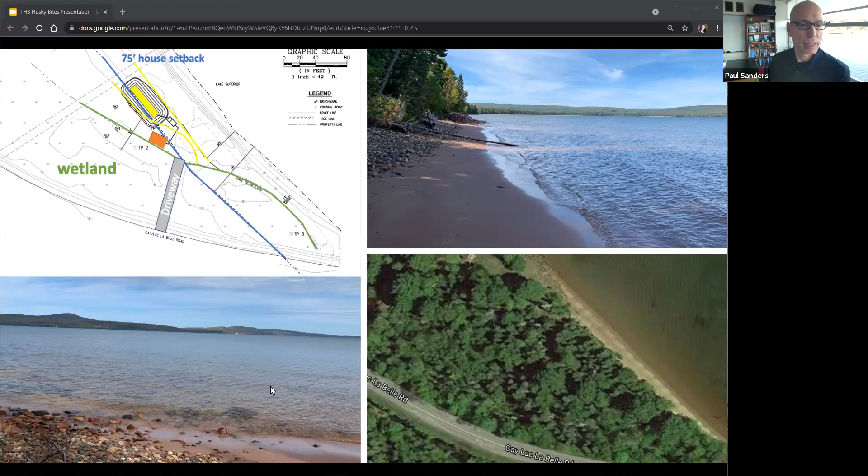Okay, next slide. So this is our first poll question.

This is a great question. I have no idea what the answer is. Well, I tried to be creative in some of those answers. Okay, I'm going to go with Gray Beast. So the choices are: Betty Grease, Gray Beast, Green Bay, or East is Better. There's a live poll going on, and the top 2 choices seem to be Gray Beast or Green Bay. Anyway, this is hilarious. Tell us the answer, Paul.

Okay, so the answer is actually Gray Beast. Good job, the majority or the plurality of people got that right. Let's move on to the next slide then. And if you have this in front of you and you don't want to see it anymore, just hit the X on the poll question and the little box will go away.

Okay, so Dave, do you want to take this slide? Oops, we can't hear you. Unmute. I'm unmuted.

So the design goals here are to use sustainable design to build the building. We had a couple other chief parts of that, and one was net zero energy. In other words, we wanted to produce as much energy on site as we would use on site. We used the source method, and I'll go into more detail on that later.

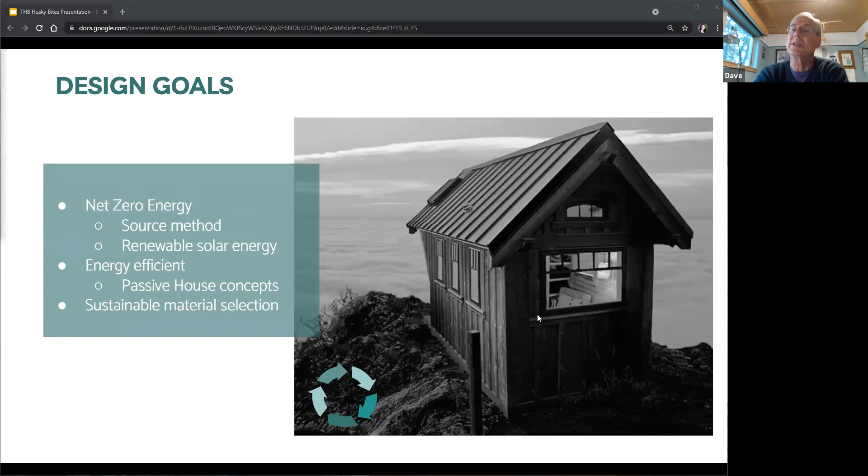Since I'm in material science and engineering, I should have my token material slide in this deck. Our strategy with sustainable materials was pretty simple at a high level. First of all, we wanted to avoid concrete because concrete contributes globally 8% of greenhouse gases. We used wood, a renewable material, but also whatever we build into the structure, we sequester the carbon there.

As a metallurgist, I'm partial to steel. One of the reasons we like steel for an exterior is that it's maintenance free essentially for the life of the building, but it's also typically about 50% recycled, one of the most recycled materials that we use. And finally, we used green insulation. This is just an example of some of the charts we looked at to make our material decisions. Fiberglass insulation was used to minimize the carbon impact.

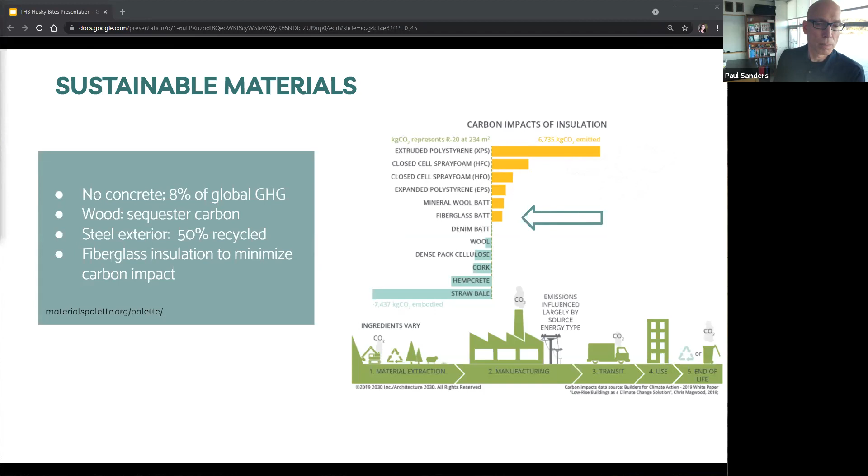Okay, and then Dave's got a couple slides here on net zero energy. Yes, net zero energy by the source method. As we worked through this as a team, this was hard for us to get our heads around at first. So when we talk about the source method, what we're talking about is all the energy that went into making the energy that comes into the house.

Say we're looking at electricity and coal is the power plant. So we're looking at all the energy that would go from extraction of the coal through the steam generators, transmission lines, to the plug at the house. And the source energy conversion factor for electricity is 3.15. So for every one unit of energy we get at the house, it took 3.15 units of energy to produce that. So electricity is about 33% efficient at the plug.

The other fuel we used on this project was propane, or LP. Here you can see the conversion factor is smaller - in other words, there's less embodied energy in making propane than there is in electricity. So our goal here is for all the electricity and propane we consume on site to be equal to or less than the production we would have on site.

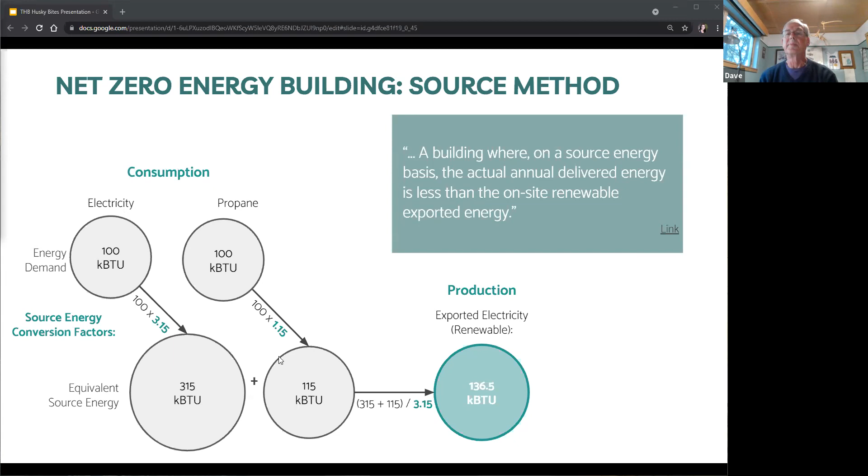So here is a little bit more about the passive house concepts we used. Let's start in the upper left-hand corner: no thermal bridges. Let's talk about a standard 2x4 or 2x6 wall, if you're familiar with that from residential construction. The stud goes through the wall from outside to inside. Wood is a fairly good insulator, but not as good as fiberglass or the material in the cavity. Therefore, we consider the 2x4, 2x6, a thermal bridge.

And we would like to have a thermal break on that bridge. You can really cut down on your energy use if you separate the conductive components from the outside. We used a double stud wall - just imagine two frame walls spaced apart, so there's very little conduction of heat through the framing. Now the thermal envelope - the part that separates the habitants from the outside - we were able to build walls that were at least R30, a roof of at least R60, and a floor of at least R30.

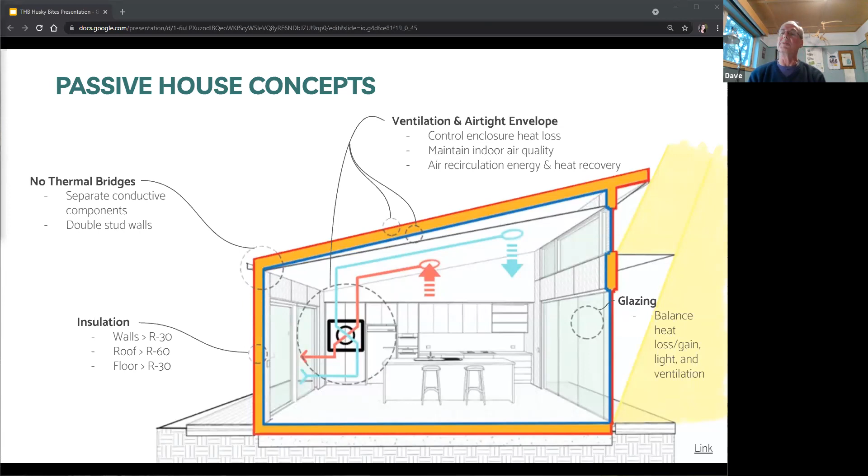So here's our second poll. Was Paul looking for a net zero energy house? Yes or no? I know I sort of gave it away earlier. Just seeing if you were listening.

Dave, I got to have you come take a look at my house. You can hear the wind blowing through it. Yeah, did the curtains move? Yes. Yeah. I think it's like R minus 10 or something like that. I don't know. It's some sort of bad number.

All right. Okay, so we're not doing real well on this question. No, I wasn't looking for a net zero energy house. Dave and the students and Chris were seeking to build one, I think, and I got one. So I'm thankful for that, but it wasn't my original intention.

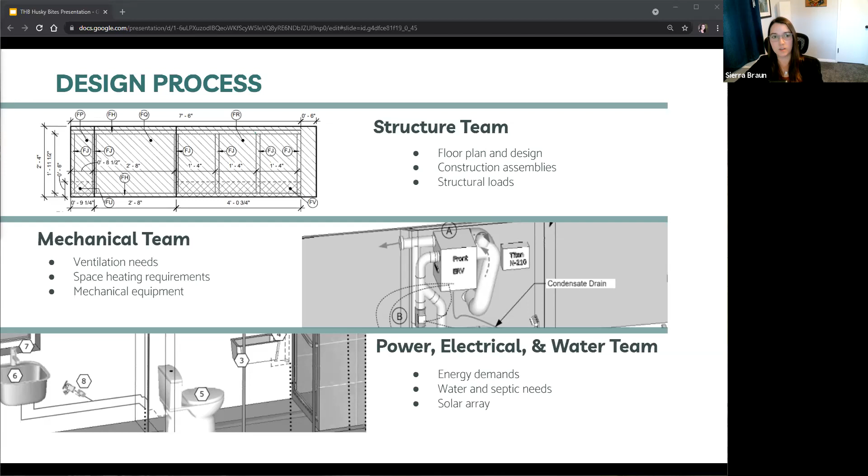We also had a mechanical team who worked with our proposed wall assemblies to determine ventilation and heating equipment to be used in the house, and a team that focused on getting power, water, and electricity while aiming for those net zero energy goals. Another aspect of this project that's still in the works is the solar array system and a home performance monitoring system that Nick is diving into this semester. And like Dave said, we used a bunch of different software packages, both from Passive House and some that Dave designed himself to make it all work.

To show some of our progress through the spring of 2020, I added some of our early design ideas for the tiny house so you can see how much it morphed over the semester in our design phase. Like I said, the learning curve was really steep in the beginning. All of us were trying to pack our brains with knowledge from Dave while learning the different design programs for drafting and energy modeling. And we were trying to make sure we were meeting everything Paul wanted in his tiny house for his family. So from these early renders, you can really see how the house has evolved, especially in terms of roof design, layout, and exterior appearance.

You'll see the bathroom moves around a lot, the roof changes, and all of these were in consideration of where the solar array was going to be placed, as well as getting the best views and performance monitoring. So each iteration of these houses we modeled in the different design packages to determine which one was going to perform the best for our goals. So yeah. Another thing we had to figure out was how to break this house apart into sections or panels so that we could build them on campus.

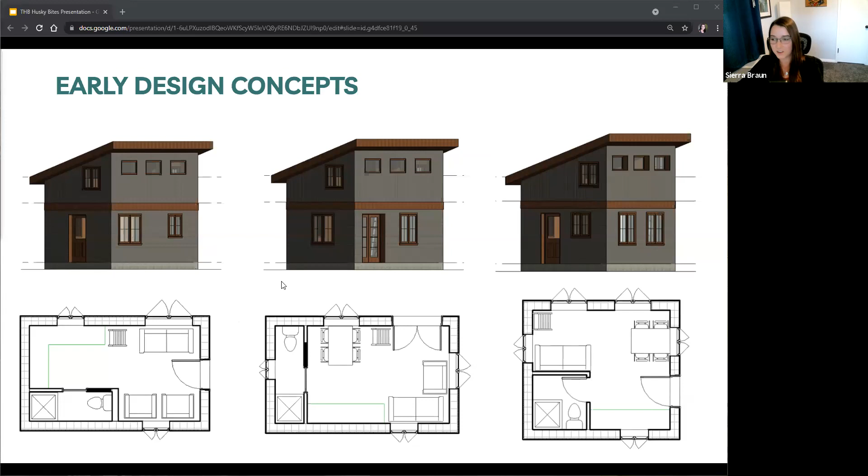Now I'll move on to the final design. So like Paul showed earlier, this is the same diagram from there. His lake property is on a wooded shoreline with a bunch of wetlands. So here's the building area again, very small, really basically only a tiny house could work. So it was perfect for us. The high water table also gave us some challenges with the driveway and required an engineered septic system and shallow foundations.

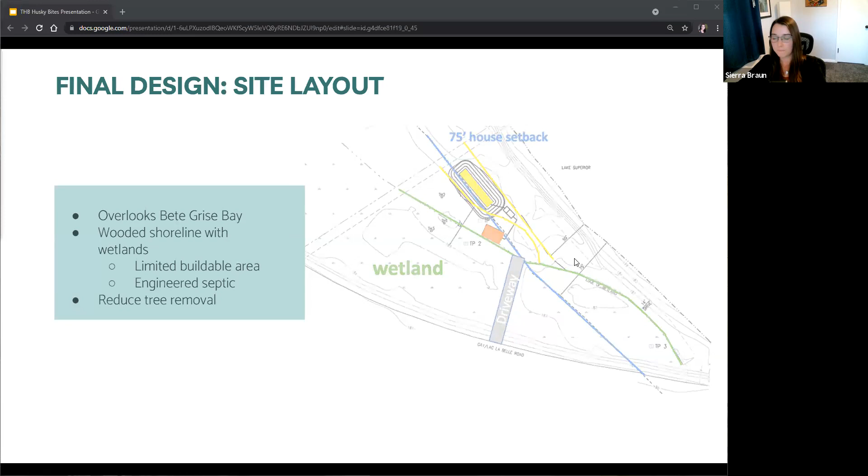If you look at the site render, you can see the viewing window to the northeast towards Bear Bluff and Mount Houghton. And in placing the house and solar array, we really aimed to reduce tree removal by utilizing the naturally open areas wherever possible.

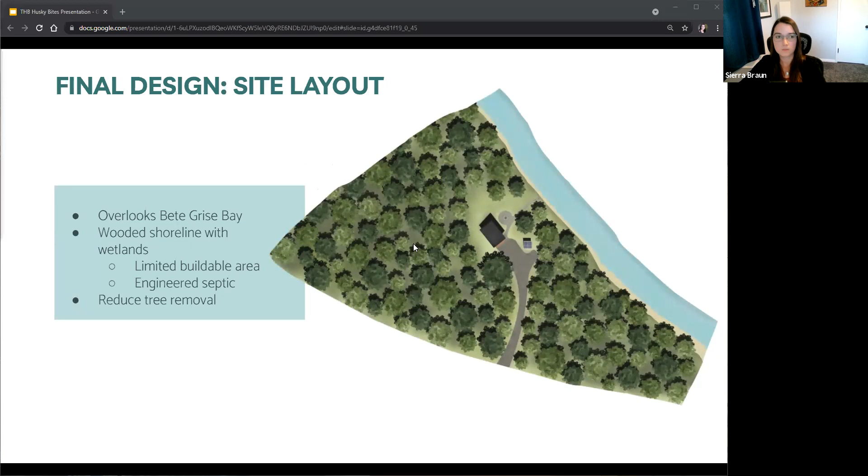Looks like we've got another poll question here. What is the legend of sound heard on Bete Grise? Yeah, so what is the legend? So the choices are: the voice from a Native American who lost her lover on the Great Lakes. The sand sings by pressing it with your hand. The sand barks when struck. The sand loses sound when removed from the beach.

I guess I really skipped my articles there. Sorry about that. I need about 3 thes in there.

You did good, Paul. Well, it looks like overwhelmingly people are going with the voice from a Native American who lost her lover on the Great Lakes. Yeah, so the answer is actually all of these, but the origin of the legend is this voice from the Native American. And then the idea is that the sand sings by pressing with your hand or when you strike it, and that actually helps this Native American woman call her lover back. And I guess the legend is also that if you remove the sand from Bete Grise, it doesn't make the noise anymore. Oh, yeah. Okay, so thanks for that poll, and we'll carry on.

Cool. So yeah, our final design on the exterior had a lot to do with the solar array placement. We had originally considered placing it on the roof, but we turned away from that in keeping as many windows and as much headroom in the loft as possible. So in determining the exterior look, a lot of it also came down to material selection. Steel siding and roofing was picked, like Paul said, for its long-lasting durability, high recyclability, and low maintenance. And of course, Paul was interested in the metallurgist vibe.

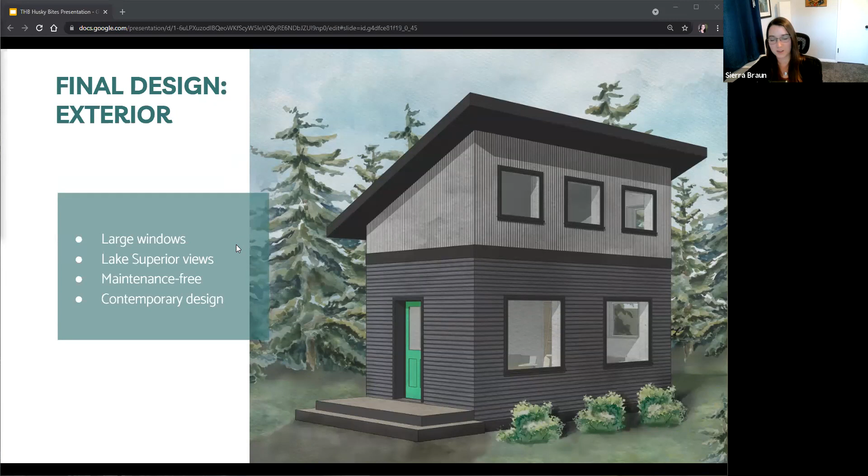As far as the interior, we kind of unanimously picked this floor plan. It's packed into a 12 by 20 footprint with 180 square feet of heated space on both the main floor and the loft. In the floor plan render on the right, you can see the bathroom and kitchen to the south, and the living room and dining area are left open to the views. The open ladder leads up to the loft where there's sleeping space for 4 and a mechanical closet. And it still has headroom to stand up in the loft, which was a big criteria for Paul. He's a tall guy. 7 feet on the tall side.

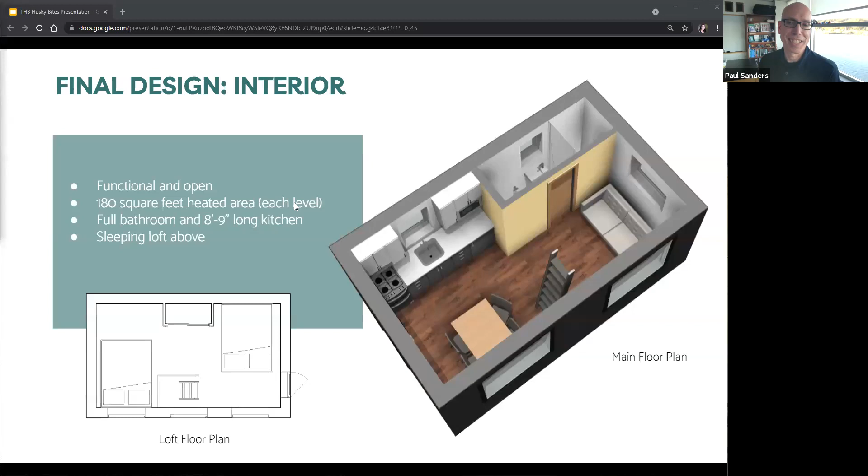So as I mentioned earlier, a ton of thought went into the construction assemblies to help us meet the high standards we set for the tiny house. So I'll just highlight the ones here, which Dave already kind of touched on. For the walls, we used two 2x4 stud walls spaced apart to provide that thermal break and a deep insulation cavity. Though they weren't the thinnest option, we decided that the availability and cost effectiveness of wood and high R fiberglass were more advantageous than some other more novel new products.

For the roof design, we stuck with wood frame construction, but stacked 2x12s and 2x4s with insulation between them to keep that thermal break. It also allowed us to have a thick roof assembly at nearly R60 while maintaining a thinner profile from the outside. And for window selection, we ended up with triple paned glass. It's filled with argon, and they also have insulated fiberglass frames, which is a pretty unique product, I guess you could say. So they'll be as high R value as possible for windows.

And we carefully placed where they were able to be operated, so where you could open the windows for ventilation, and also looked into the glazing type we used depending on the wall that the window was placed in for passive solar gain. And to align with our goal of no concrete, the whole house sits above the water table on a shallow wood frame foundation with gravel trench footings. Another key point about using conventional building materials was that it allowed our team to quickly jump into on-campus production of the wall panels, which we'll get into after Nick's digital tiny house walkthrough here.

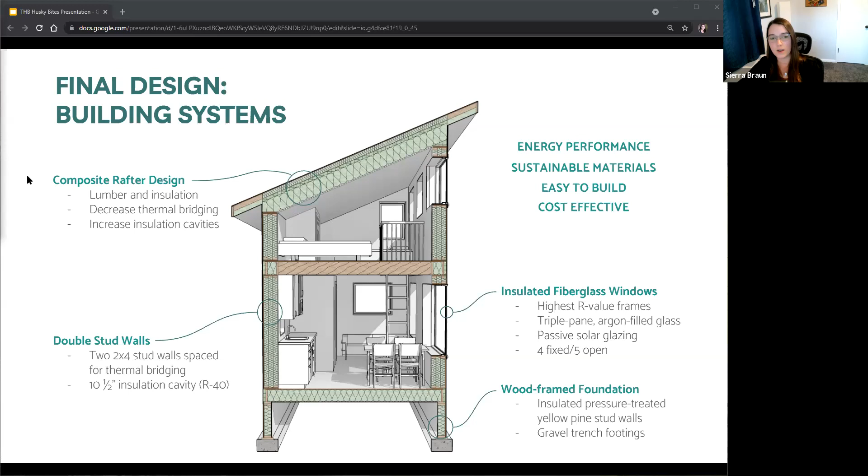Yeah, let's see if this works.

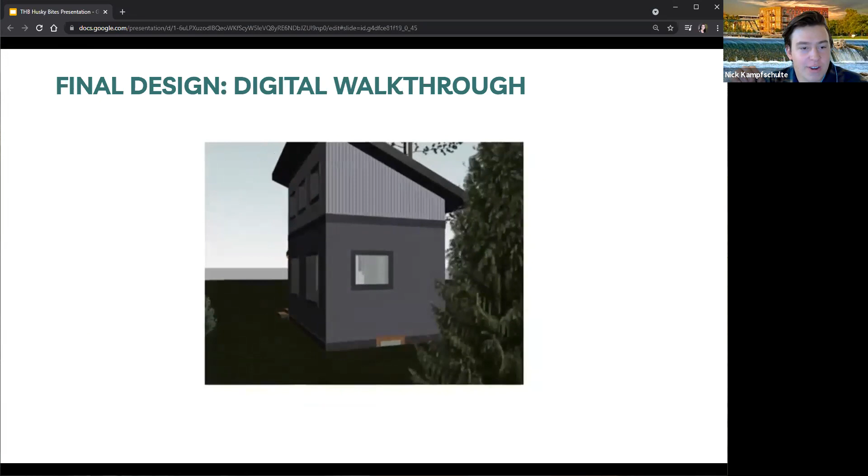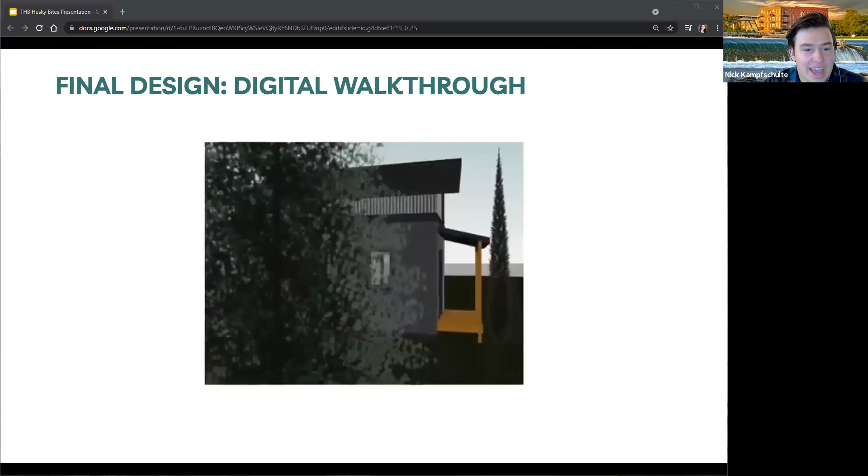Oh, seems to be going pretty well. So we're kind of flying by the exterior of the house, and I put in some trees to kind of help get you in the mindset of being on Bete Grise. So here we're coming in on the back, and the site is much more heavily wooded than this, but I wanted you guys to be able to see the house pretty well.

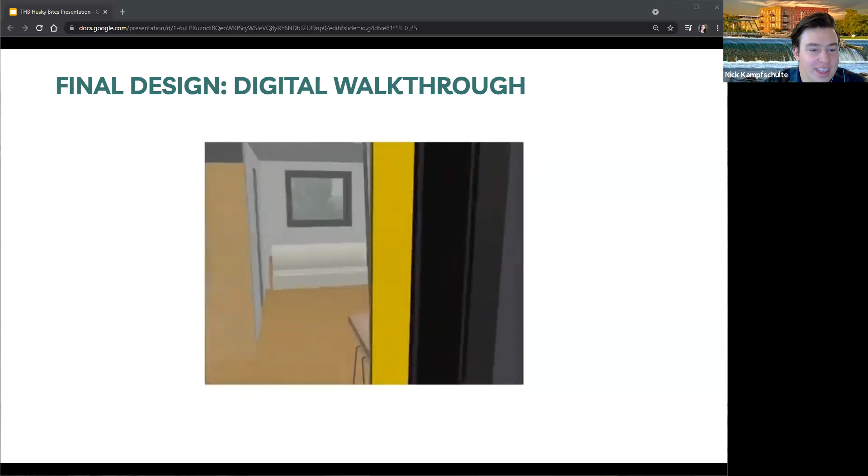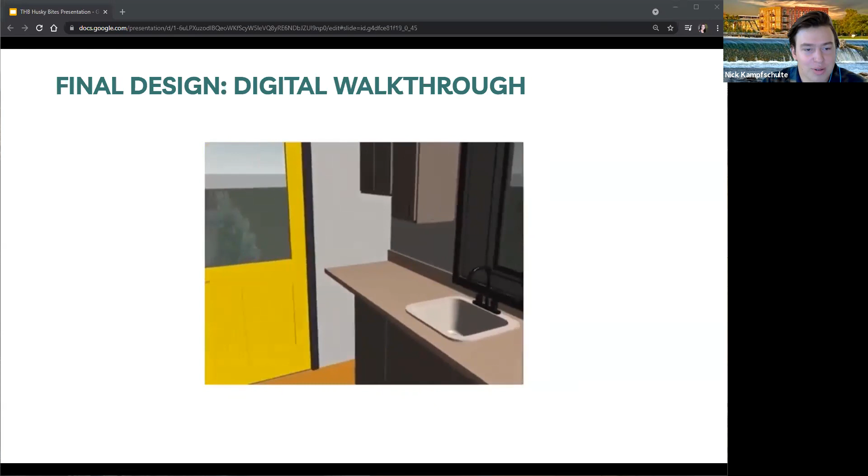So now we're zooming into the house through the front door and getting a nice look at the kitchen area, into the living area, and this is the bathroom here. It's a little fast. I'm admittedly not great at these 3D walkthroughs. And there's the kitchen, and we're going to head up to the loft. And the loft, you can see we have a lot of sleeping space, so 2 queen beds up there.

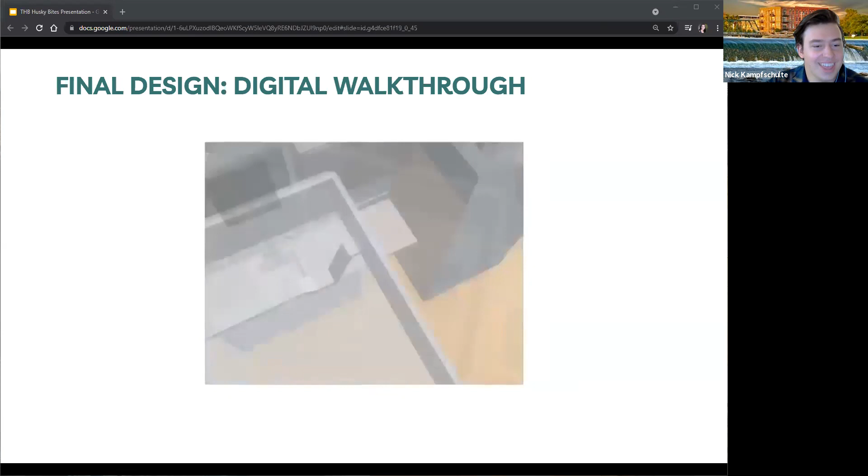And excuse the fact that it's a little see-through. I was having an issue with the software. Couldn't really remedy that issue, but now we're flying out the egress window, and there's the scene from Bete Grise right there. All right.

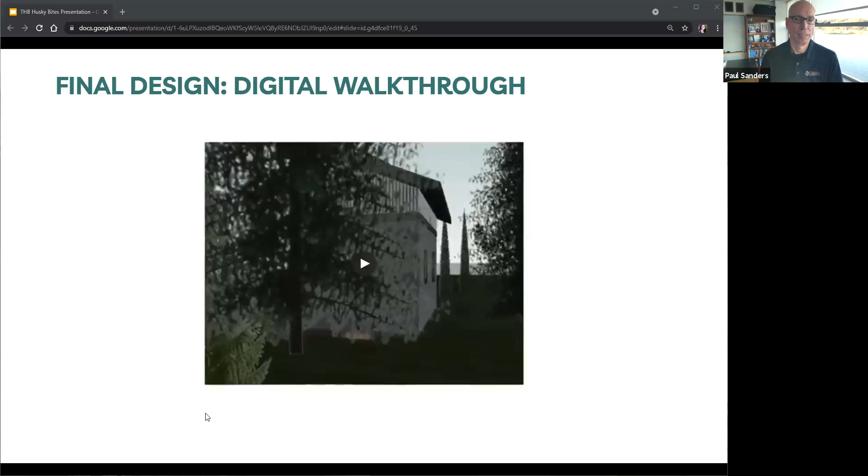Looks good. Oh, that was fun. Nicely done, Nick. That was really fun. Thank you. Nicely done, Nick.

So I believe we got another poll here. So could this project produce 2 architecture students? I vote yes. And their names are Nick and Sierra. You might be right. About Sierra, but I didn't know about Nick till he prepared his bio for this event. Yeah, okay, good. So we got yes, 94%. That's the right answer. A plus. Guess there's your decision, Nick. There we go. That takes a lot of guesswork out of it for me.

All right, so Sierra touched on, we built this building in panels on campus. And so how do you get a ton of engineers, a lot of which haven't held a hammer before, to build a house? And part of the answer to that is Chris Wojcik. So he really stuck his neck out for us and got us this lab space on campus, really prime location to receive lumber shipments. And in there we had three kind of teams working at all times. We had a management, sawing, and framing team.

And the management team would organize meetings, keep track of our COVID log, and also work with sanitizing. And then sawing people were in charge of using the bill of materials and construction drawings to cut out all of the lumber that was needed, and then they would send it over to the framing people, who would interpret the drawings, put them where they had to go, and confirm dimensions when assembly was complete.

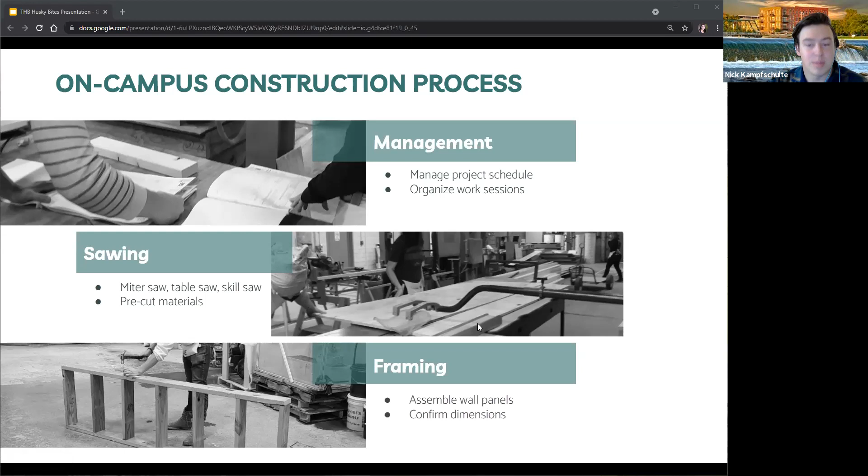So this next slide kind of goes in more depth on the foundation walls. Foundation grade lumber for longevity and rot resistance. And then that picture on the left, you can see we kind of mock assembled the foundation in the lab. We had pretty great neighbors in the lab. They put up with all of our shenanigans building a house in there, wall by wall. But here we checked the overall dimensions to make sure when Paul got on site, there wouldn't be any head scratching.

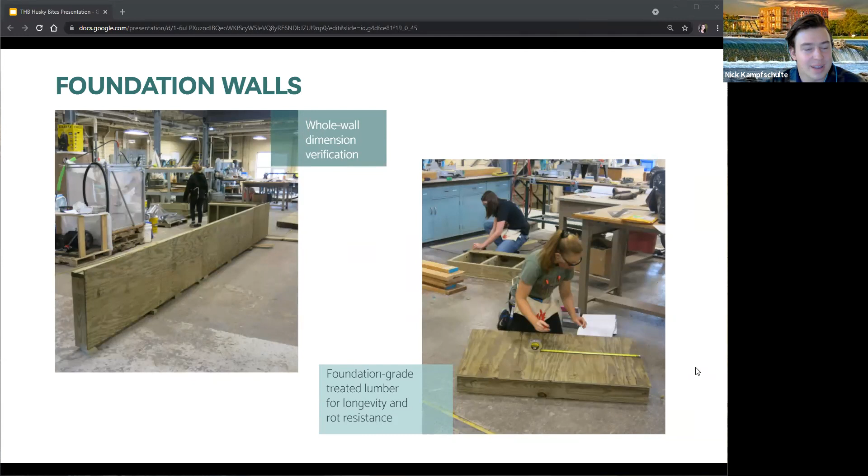So after we built the house from the bottom up, so after the foundation, we moved on to the main and loft walls. And here you can see, I think I'm in both of these. We're working on the double stud walls, and conveniently enough, the spacing was such that we could put a 2x4 in between them and nail them all together. So there's Lexi and I working on one of those. And we actually had to push the double stud wall up against a post in the lab to be able to hammer on it, because the floor was just so slippery.

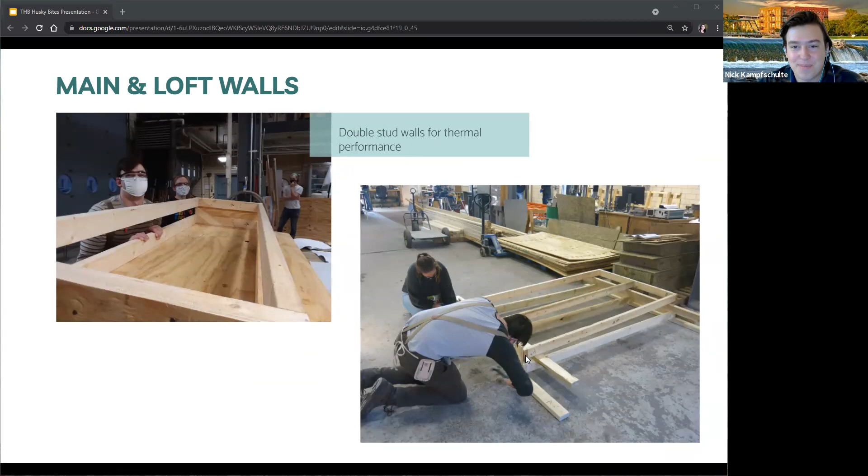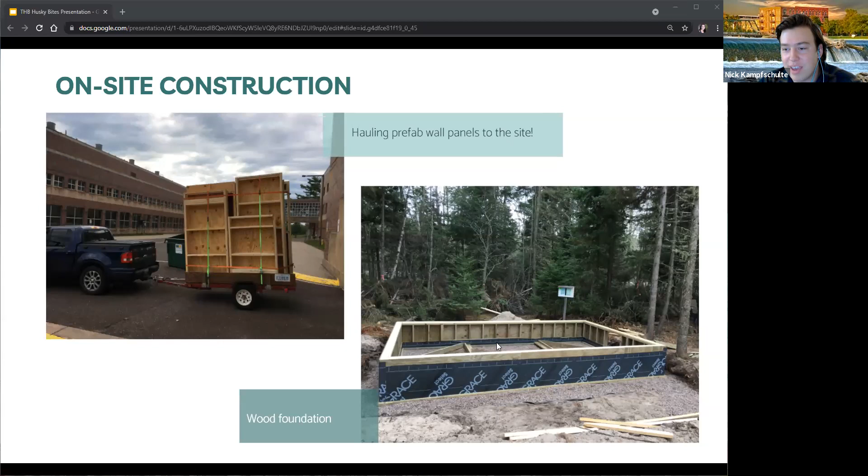That's the picture on the right. They're up on the site. They got the gravel footings in there. And moving on to the next slide, we have more on-site construction. So picture on the left, you get to kind of see what Paul will be seeing when he's sitting back at the end of all this at his kitchen table. A nice view of Bete Gris Bay.

And then on the right, we have a picture of one of our design choices to leave the floor joists for the loft exposed to kind of both make it a little more rustic and then also provide more headroom, because I'm a tall guy and those are the little things that I appreciate. I know Paul will too.

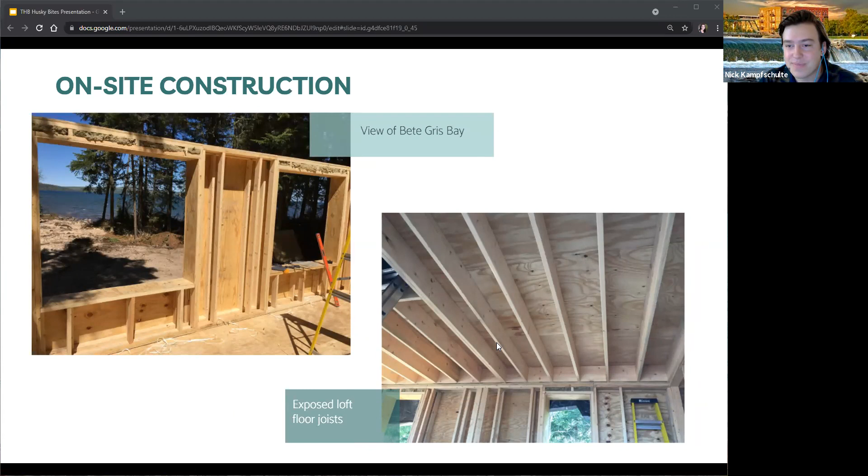And then next slide, we have more joist pictures. So our rafter design was a composite design. I know we spent a lot of time on that to meet the snow loads for this area, and potentially, we had gone back and forth between, do we put solar on the roof, do we put it on that? So we always erred on the side of caution and overbuilt when we could.

And that picture on the right, you can see one of the more recent pictures of the house. All the air, roof, all the barriers are on. So that's that thermal envelope that Dave was kind of talking about earlier. Everything in there is sealed now. On the right, you can see he got started on that metal siding that we were talking about.

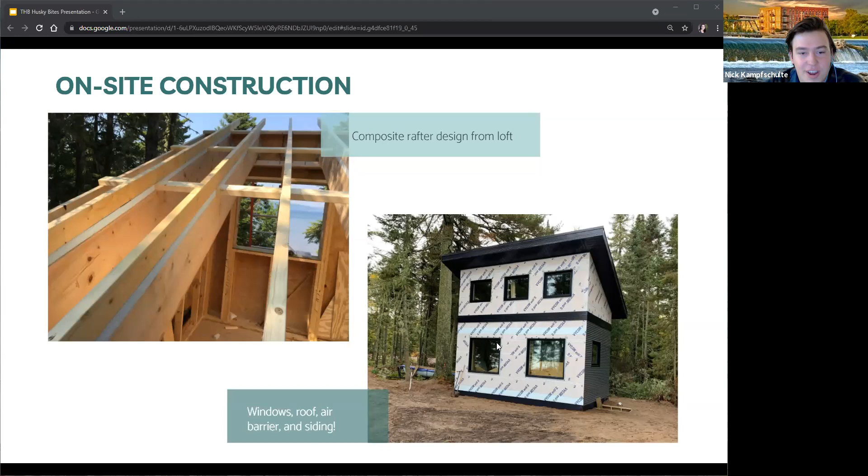So moving on, how do we know if this is all worth it? How do we know if we met these pretty rigorous standards that we set out for ourselves? And so the first thing we can do is to check our construction process using a blower door and a flow hood. And what those measure is the air tightness of the building, if we kept that thermal envelope sealed, and then the flow hood measures ventilation, because as Dave was saying, with a building so sealed up, you really need to be cautious with your ventilation to make sure that's squared away.

And to make sure we hit our thermal targets, I'm working on the thermal sensing system, and there are commercial options available, but we're doing it the tech way, making it ourselves. And this is an Arduino-based, cost-effective system, using pretty cheap sensors that are also highly reliable.

And so the plan is to, actually, we'll get into that later, but if we can gather enough thermal data, here's just an example of what we're hoping to get of how temperatures change throughout the seasons, throughout the days. We can calculate the R values of the walls given our measured values and then see if we hit our target. And another thing that Dave led me onto was that there's not a whole lot of data out there about how moisture travels through a wall assembly. So we're hoping to gain more insight on that by using combined temperature and humidity sensors.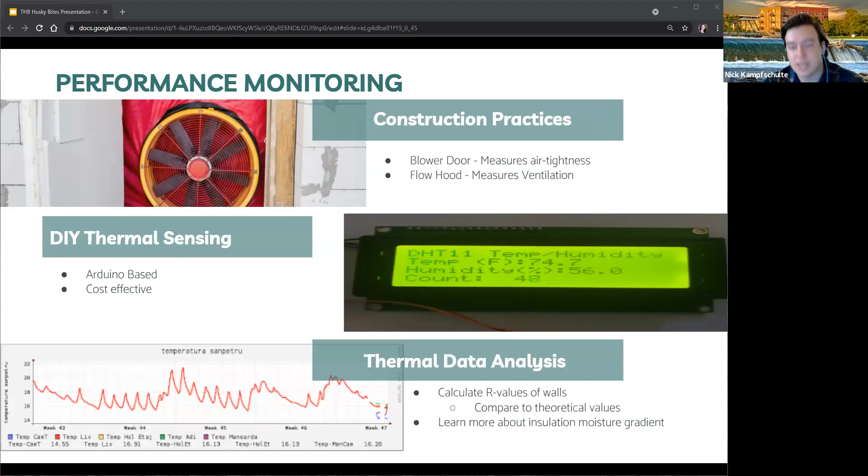And then using this data, we can also kind of calculate, sorry, Sierra, calculate predictive energy consumption and kind of put together a report for Paul, so what he can expect to spend on the house throughout the years, heating it and so forth.

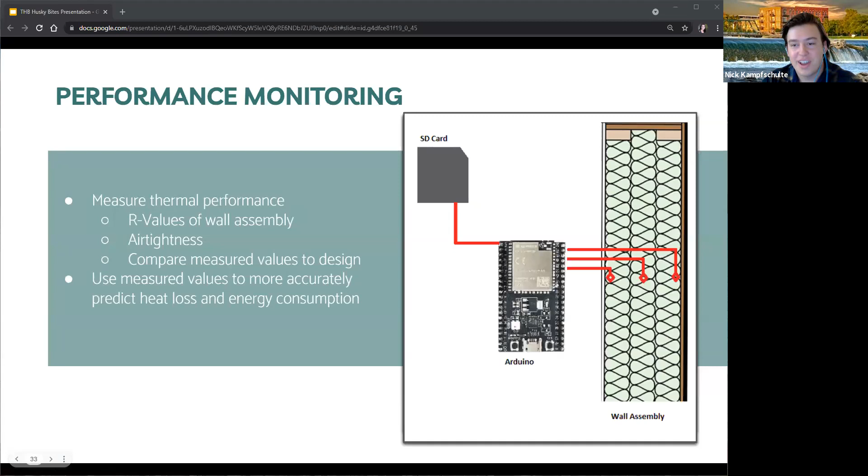Yeah, but for me, my focus is just trying to get this thing weather tight before the snow flies. I've learned a lot, had a great time, but I've got this singular focus right now, besides showing up for work, to get my tiny house closed up.

Sorry, Sierra, what were you going to say? I was just going to say that it's really prepared me well for my job in architecture, as an architectural designer right now, as I do my master's in architecture and look towards getting my license someday. So really awesome project to be a part of.